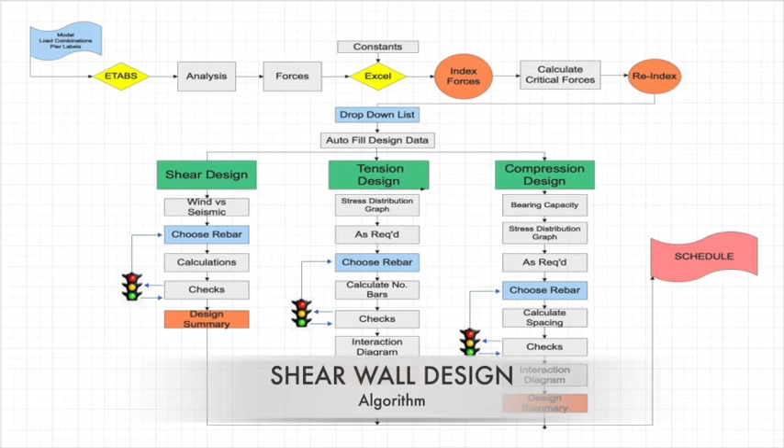Our methodical approach to design stems from first principle thinking. Industry standard software shown here was used to ensure the needs of our client were met, as well as all code-related requirements. To ensure efficiency and accuracy in our design, complex algorithms were developed for each structural element. This allowed for a streamlined design process and constant communication between team members.

Based on preliminary designs, a reinforced concrete structural framing system consisting of lineal and core shear walls was chosen based on cost, practicality, and our client's needs.

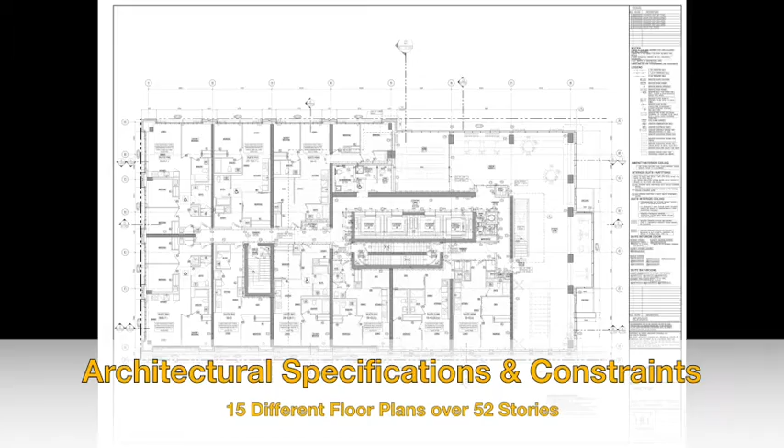Structural modeling and analysis was the most time-demanding task. There were very complex architectural specifications involving load transfers, changes in building geometry, and 15 different floor plans over 52 levels shown here. ETABS was used primarily for analysis and to generate loads, while Revit and Robot were used to validate ETABS loads and for detailing purposes.

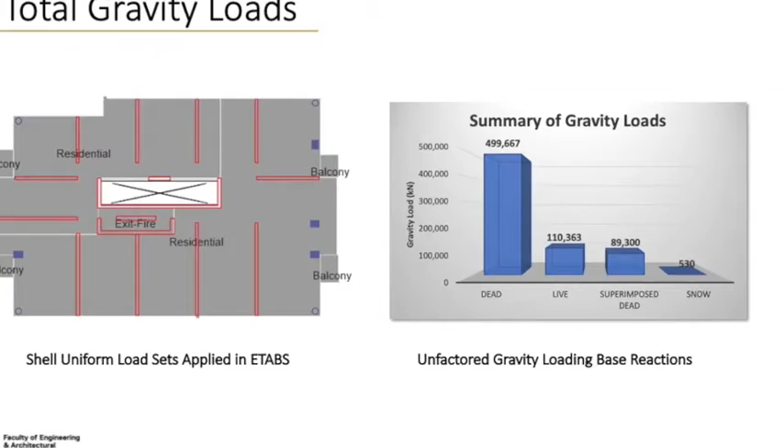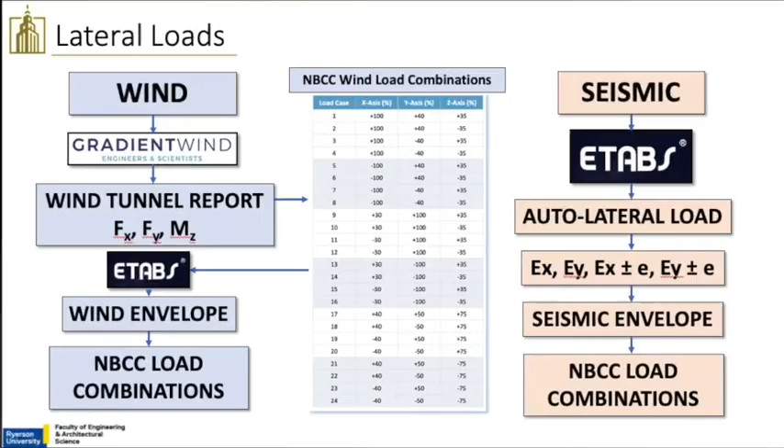Gravity loads were meticulously calculated based on element dimensions, building occupancy, and building finishes. Wind loads in X, Y, and Z direction were calculated by a wind tunnel and applied to the 24 NBCC wind load combinations. Seismic loads were determined by ETABS while considering 10% eccentricity and accidental torsion.

Slab thickness varies between 200 and 250 millimeters based on occupancy loads. One-way and two-way slabs were identified and designed accordingly in SAFE to ensure factored shear and flexural resistance were adequate, as well as crack control. One-way and two-way punching shear checks were also performed.

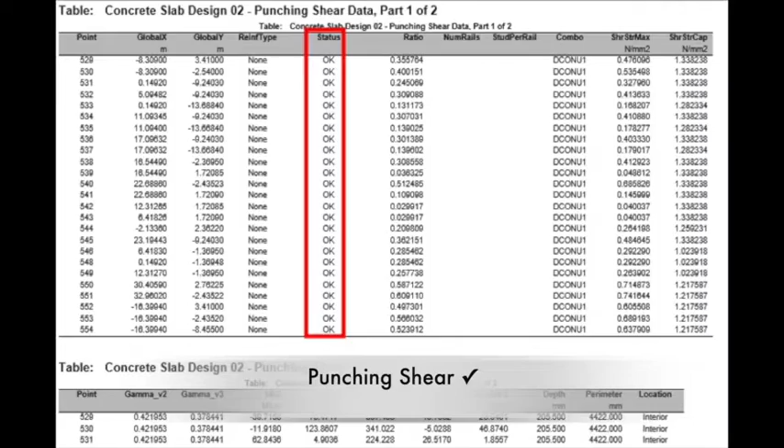Due to column offsets and parking levels, to maximize parking revenue for the client, high deformation zones were identified and accounted for in our design. Detailing of slabs were also performed in SAFE, and all code-required checks were reviewed.

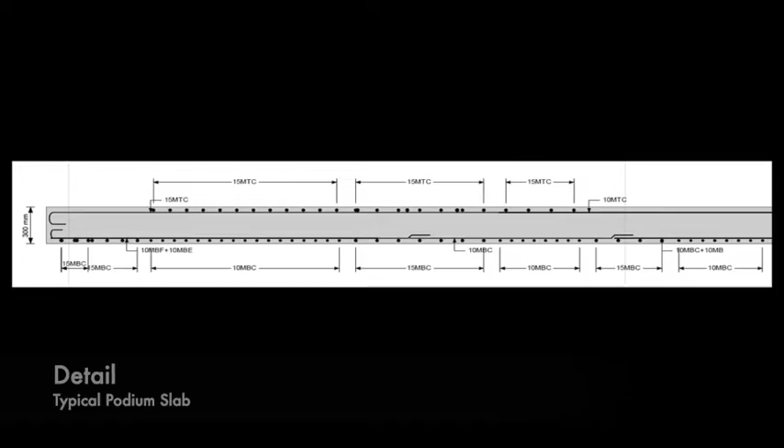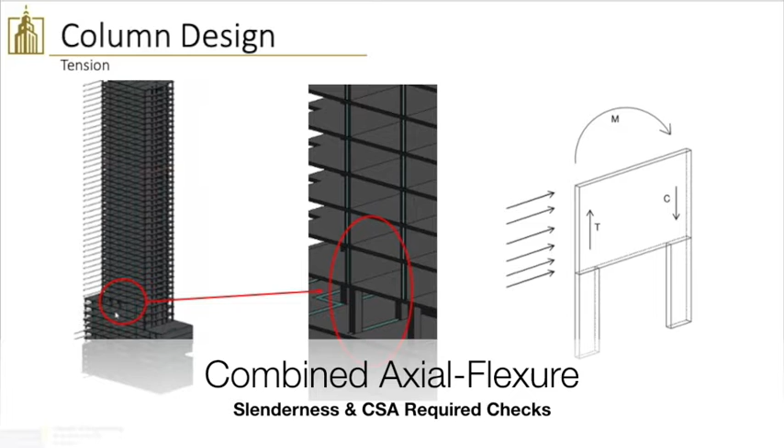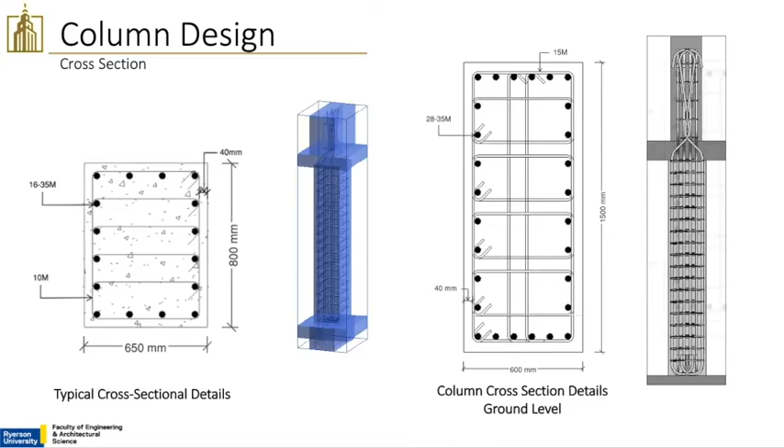Excel was used to design columns accounting for slenderness effects, combined axial and flexure, and possible tension loads, as there are a number of transfers between shear walls and columns where the shear walls experience tensile stress. Interaction diagrams were developed and checked for each column, and detailing was carried out in Revit, which produced very detailed cross-sectional drawings as well as 3D models of sections shown here.

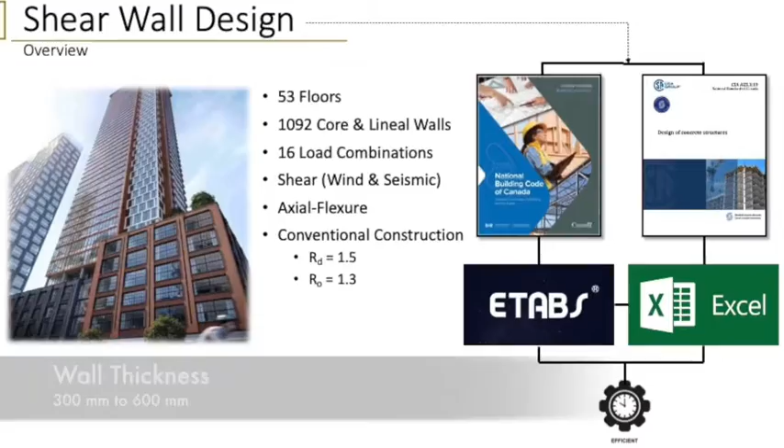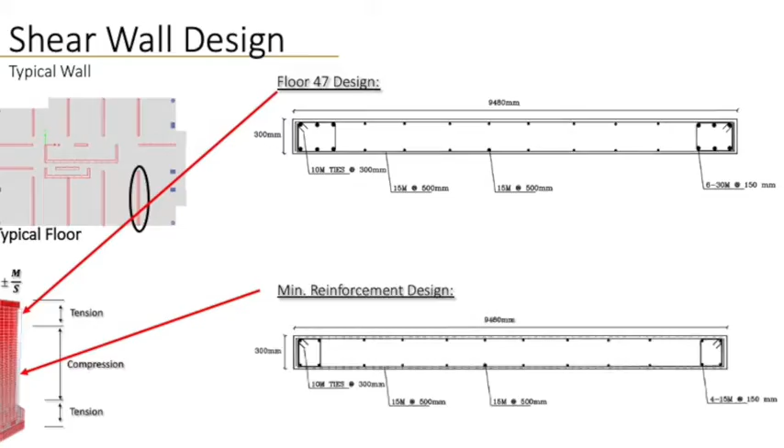Shear walls were designed using Excel, considering both wind and seismic lateral loads as well as combined axial flexure. The wall thickness ranges from 300 to 600 millimeters, and based on our analysis, tension stresses exist in the top 5 stories, below which there is a pure compression zone which requires only minimum reinforcements all the way down to the 12th floor. Below this, there is a significant change in building geometry, a large wall column transfer, and significant tension stresses again.

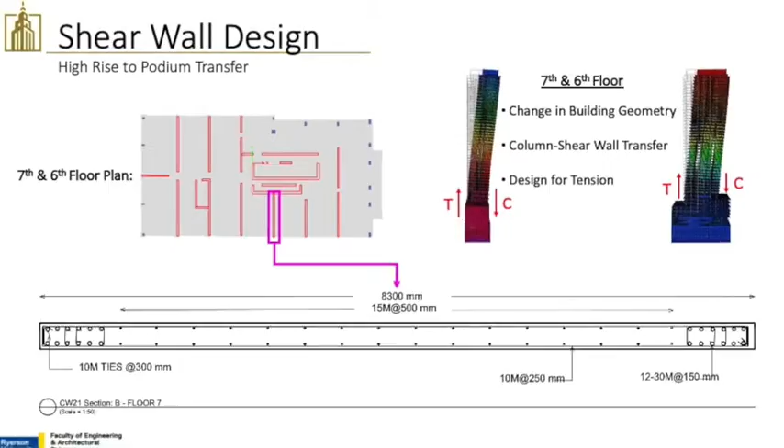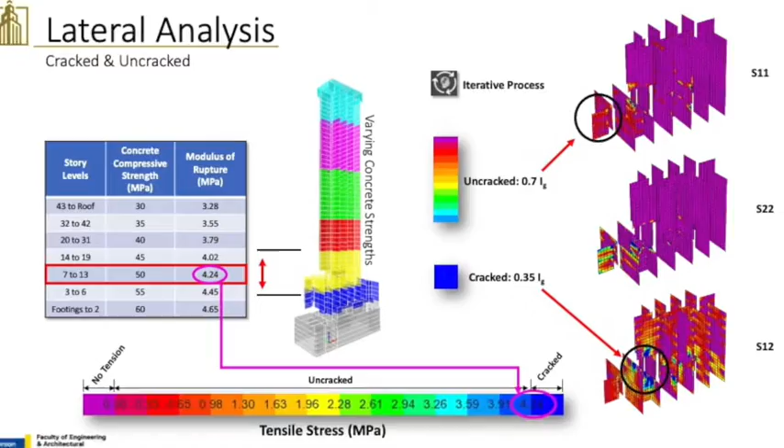The ground level elevator core shown here requires only minimum vertical reinforcements, but heavy horizontal reinforcements are required. Noble conducted an in-depth lateral analysis of the building in which code-required stiffness modifiers were applied to cracked and uncracked walls through an iterative procedure shown here, where the stresses in the walls were examined to determine if the modulus of rupture was exceeded.

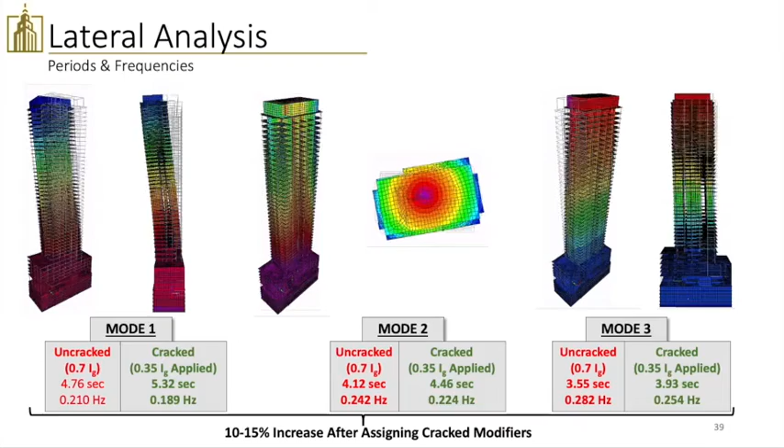The result is a 10 to 15% increase in the building periods when subjected to lateral loads, and the maximum deflection of the building and the maximum inter-story drifts due to both wind and seismic were determined to be adequate.

The foundation of the building sits on shale bedrock with a high bearing capacity, so optimal footing dimensions were determined to be relatively small, but to prevent punching shear, the application of a strut and tie method with compression fan stress distribution was required in design.

The result: a total settlement of only 25 millimeters and maximum differential settlement of 19 millimeters. The foundation walls experience relatively small moments due to lateral earth pressure, and as a result require only minimum reinforcements in design.

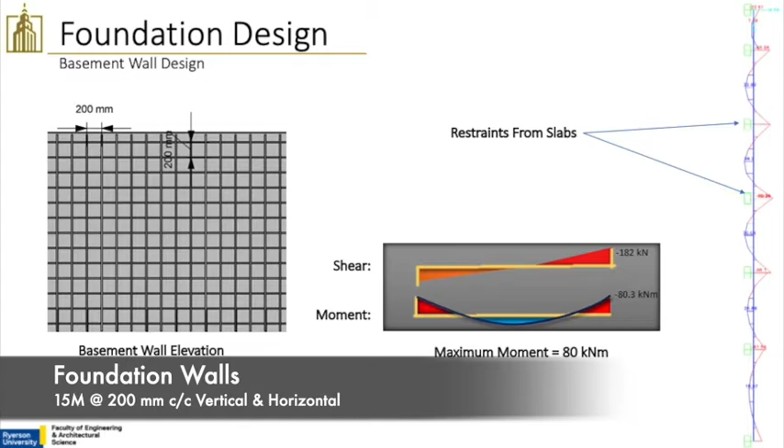Noble's costing team conducted an in-depth analysis using database-driven software. All direct and indirect costs were considered in analysis, including contingencies, markups, interest, inflation, and even interior finishes.

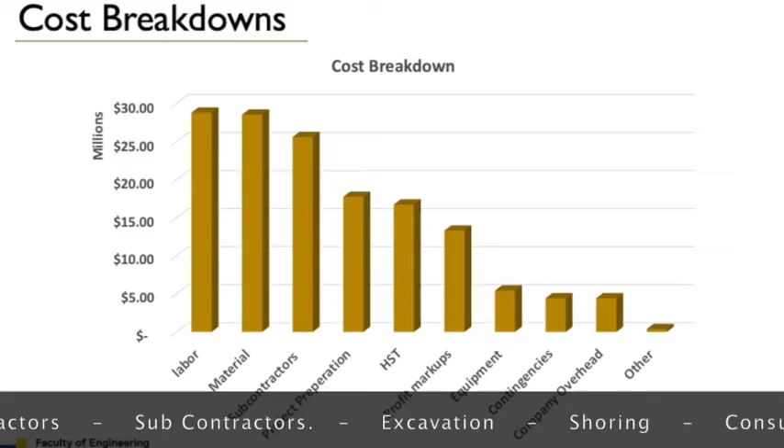The final cost was determined to be $182 million, which is a savings of over $1 million from our preliminary analysis. With an estimated market retail value of $250 million, this provides the owners with an estimated profit of $68 million.